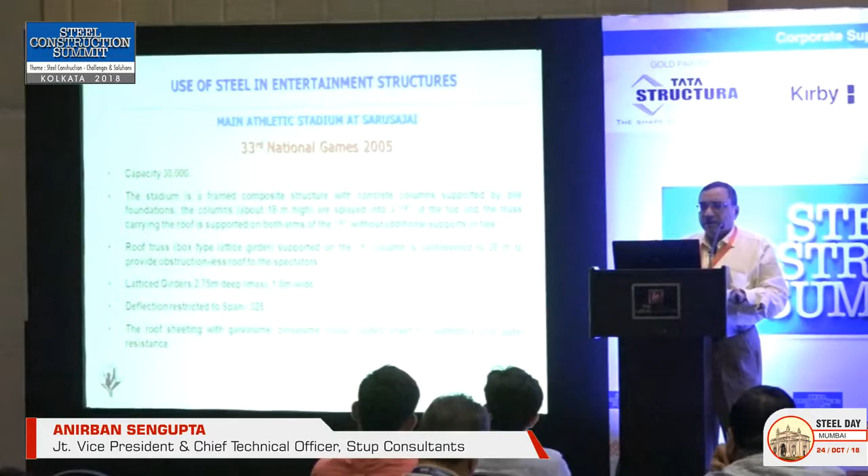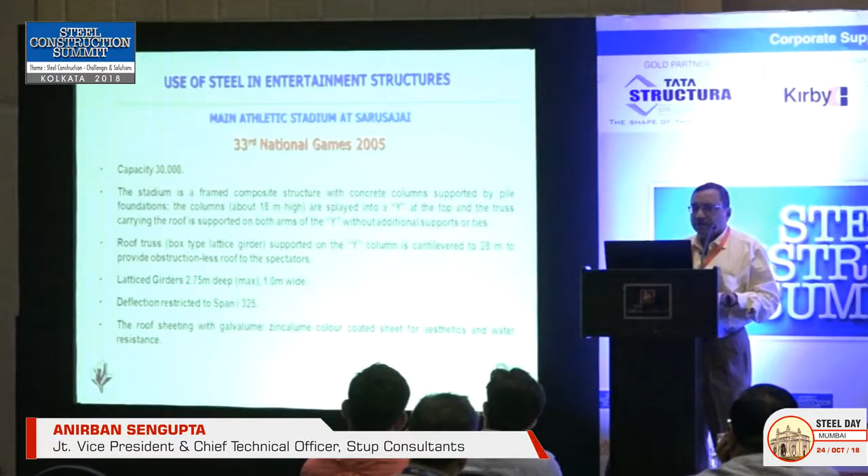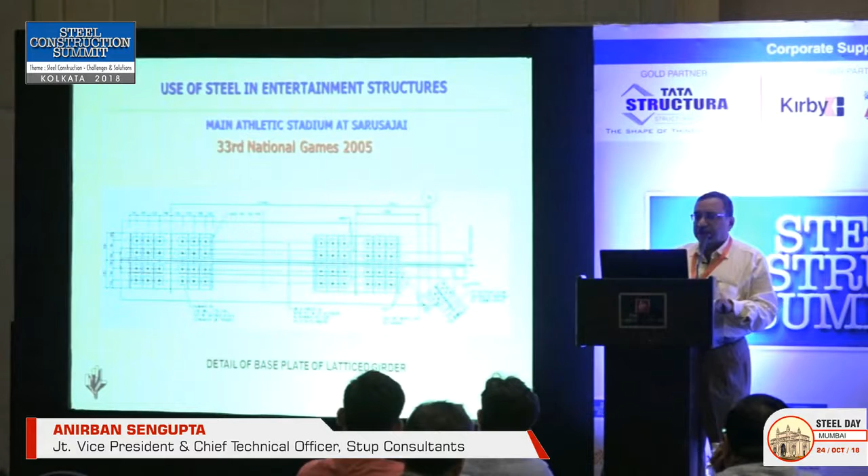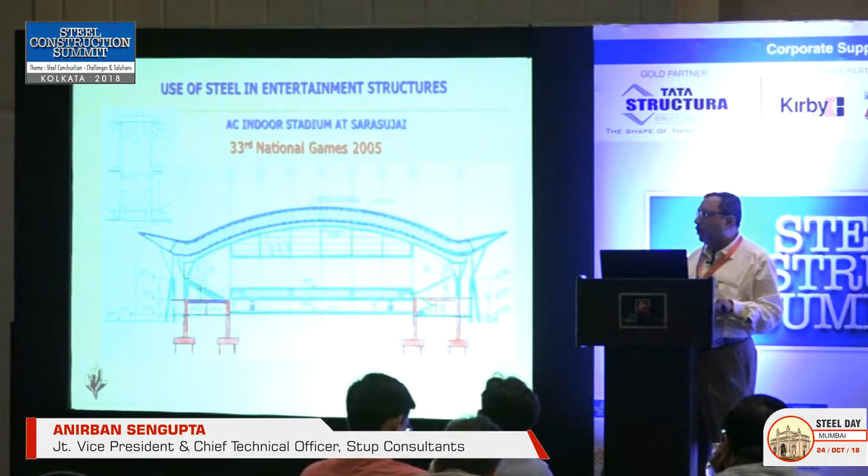This is another indoor stadium. This is the architectural view. Here also the span is very large: 60-meter span, and this truss is around 3 meter depth with 1 meter wide box. This box has been used because in these stadiums a lot of utility pipings, lighting systems, special lightings and cables are fixed on this truss. There is a catwalk on every truss, people can walk inside. That's why the height has been made so large. So this is another example of large span steel construction.

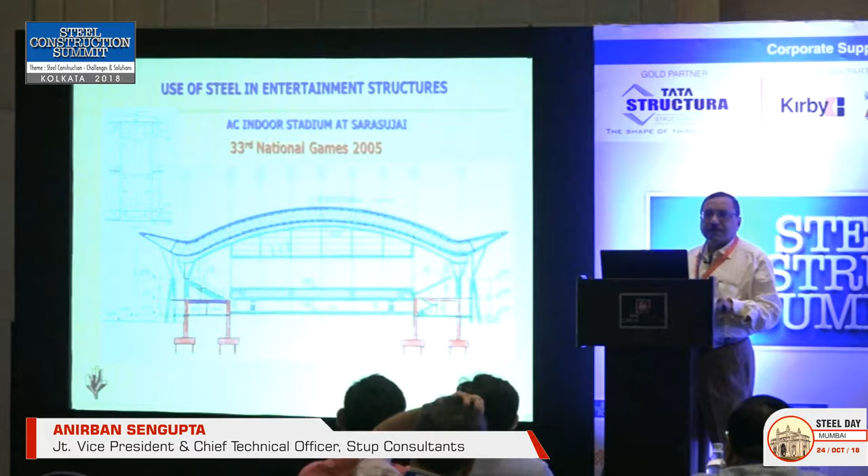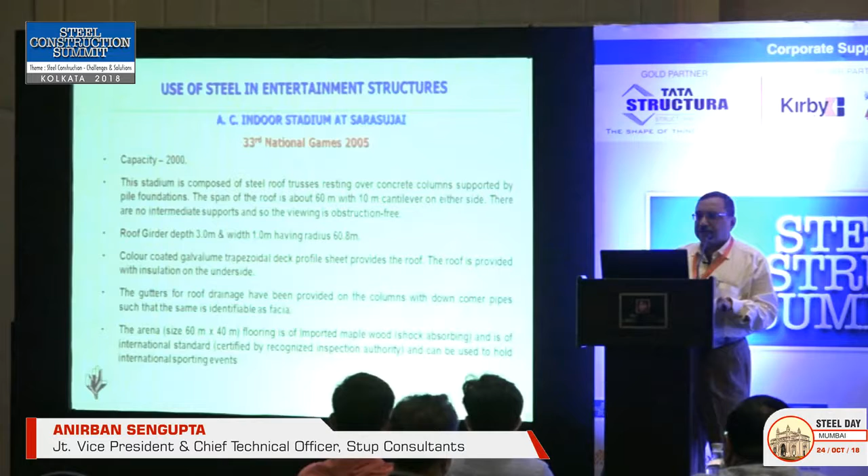This is another stadium called Rajiv Gandhi Indoor Stadium in the same project. This was a double curvature roof, unlike the single curvature ones I have shown you, with a rhino type of nose in the front and back. This follows the architectural requirement, as Manas in Assam is the main sanctuary where the rhino is the main animal. I will just speak about the structural system.

We made a spine arch of 150 meter span at the center, springing from foundation on one side to the other, supported on driven batter piles and some vertical piles. All the other members are latticed girders with spans from 19 to 40 meters, supported on this arch. The arch was built first, all deflections were measured and matched to each truss, so there was no mismatch while erecting.

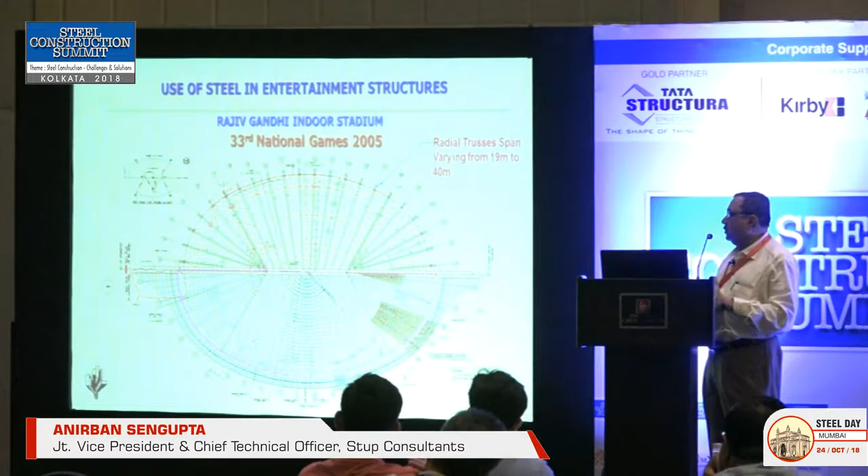Now this is the arch view, 150-meter span with 3.5-meter depth and 2.5-meter wide. This is also an indoor stadium with 2,500 capacity.

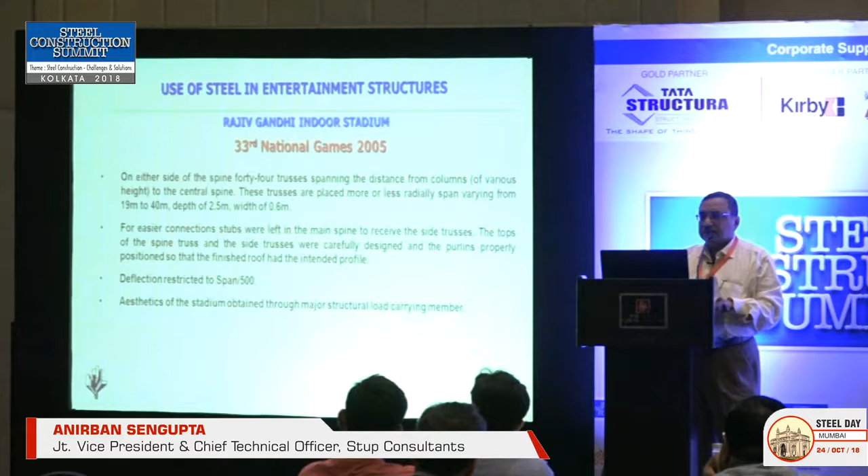Now this National Games project has also won first prize from the Consulting Engineers Association of India for excellence in project dealing, project execution and project engineering.

Now this is a unique stadium. This is the Velodrome in the Commonwealth Games. This was constructed in a very short time. The engineer, contractor, the designer, the client, which was Central Public Works Department, CPWD, all had to work together, and the approving authority was IIT Delhi.

So we had to work very fast, and the time was fixed for the Commonwealth Games. You know that for the Commonwealth Games a number of stadia have been built. This is the last stadium which was awarded to the contractor and to the consultant. This is the last project, and we had the shortest time to build this. So what we have done

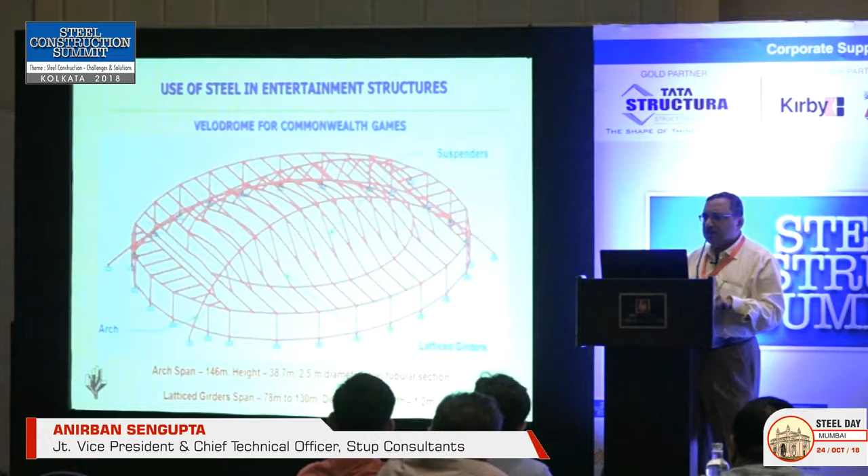So this is the model, these are the two arches, and these are the trusses supported through these hangers. So the arch span is around 150 meter, 146 meter, and height of 38.7. So this is the geometry of the structure.

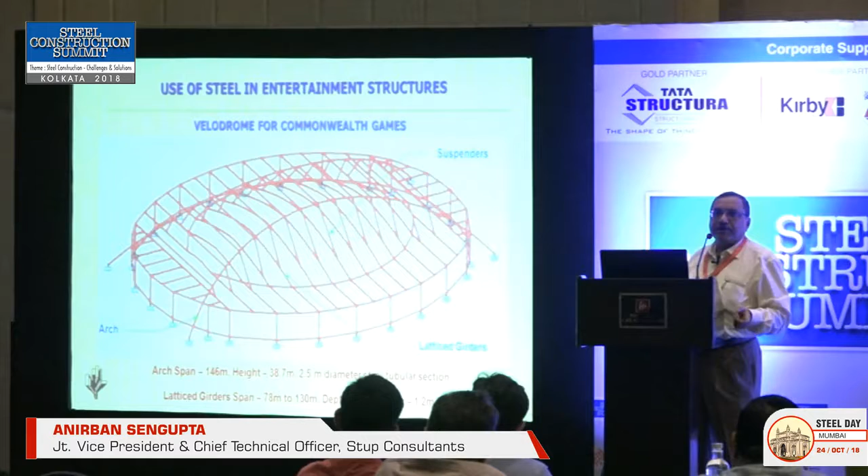Now if you see inside, there is no column inside. So whatever stadium I am showing, there is no column inside, and the viewing is totally free. This side is around 100 meter, and lengthwise almost 150 meter. So there is no column inside. The whole structure is very long span and supported from the roof.

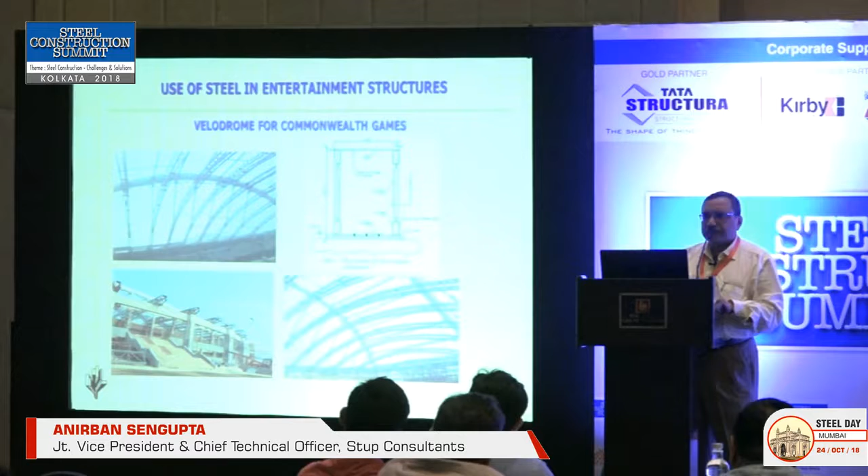This is the section of the truss, 1.2 meter by 1.5 meter. Very thin trusses; inside trusses are 100 meter span. Only a depth of 1.5 meter by 1.2 meter wide, possible because of 5 intermediate supports from the arch through hangers. You can see other views. These are some detailings; I am not deliberating much more on this. This is the truss base detail.

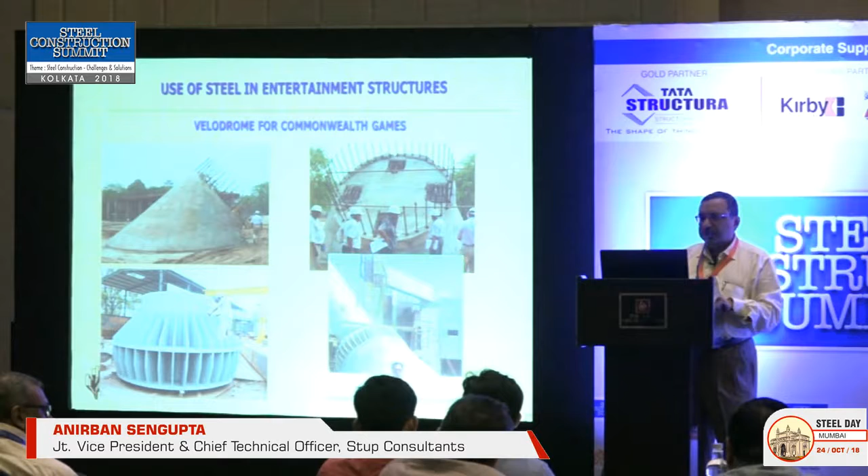Now, as already told by Carol, for this project STUP got the first prize from INSDAG for innovative structures in 2011-12, and the CPWD executive engineer who was in charge of the project also got an award of excellence from the CPWD Director General.

This is a very enlightening word. The Delhi Velodrome is an absolutely marvelous facility of the highest standard, probably only surpassed by the Beijing Olympic Velodrome, which was built at a cost of $215 million. This was told by Roy Godkin, Honorary Vice President of the International Cycling Federation. Unless he gives permission, by homologating the velodrome, no international competition can be held in a velodrome structure. So he is the main man, and he was so impressed that he passed this comment. If you see, Beijing Velodrome cost $215 million, while Delhi Velodrome was built for only $34 million.

Now I am showing you some structures in and around nearby. There I can show you a number of structures. We have done the Noida Stadium, and we are now doing the Air Force Museum in Delhi, which are all space structures and very complicated structures, all in steel. If I go on showing all of them it will take long, so I am showing recent structures. These are all already built, but this one is under construction.

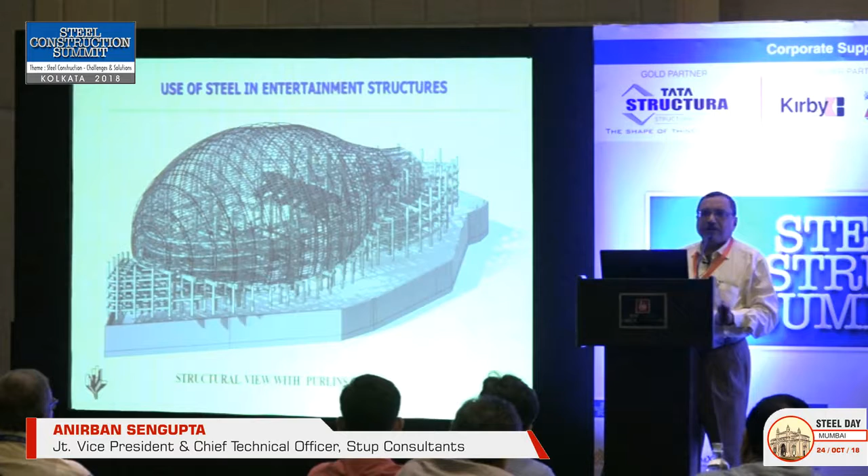This is actually the frame structure. What was built here was done in an ETABS model. This is the steel part of it - there are concrete columns where rooms etc. are, and these are the steel frames entirely. This is very difficult to show with this view, and you can imagine how difficult it was to design. We have completed it, and very soon - I don't know the exact date of completion - it will be done, and you will be able to see a very nice structure in the Kolkata Alipur area.

This is another bridge, but this is not a vehicular bridge - it is a pedestrian bridge, and at the same time it is an amusement park also. Normally bridges are 7, 8, 10, 14 meters wide - 14 meters being a two-lane bridge - so multiples of that are being built. But this is a pedestrian bridge, width is 20-25 meters, so people can go inside, sit, and enjoy the river.

It is under construction in Gujarat, at Ahmedabad, over the Sabarmati river. If you go there, there are bank developments - a lower promenade and upper promenade where you can walk, and boating facilities are there. They are building this, between the Ellis Bridge and the Sardar Bridge, there are two vehicular bridges. They are building this type of bridge which is full of steel construction.

It is full of steel construction, there is nothing there except the walkway - everything is steel. We tried to make the walkway of timber too, but because of durability issues we could not. I tried to make it with a very high grade of steel, because the stress variation which causes fatigue is not that high here, since dead load is always permanent and live load is basically not as high as in road or railway bridges. But I could not get steel better than E410 grade. We talked to a number of people - there is a steel forum here - so I am telling you, please start manufacturing those high grade steels so that we can use them somewhere.

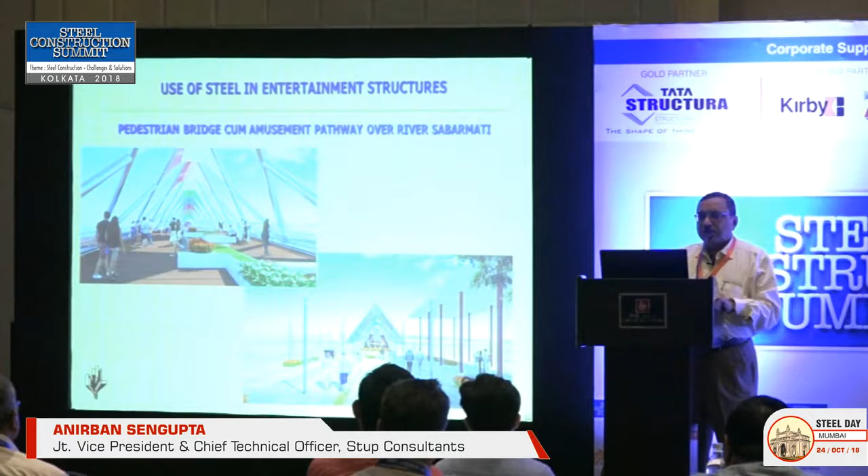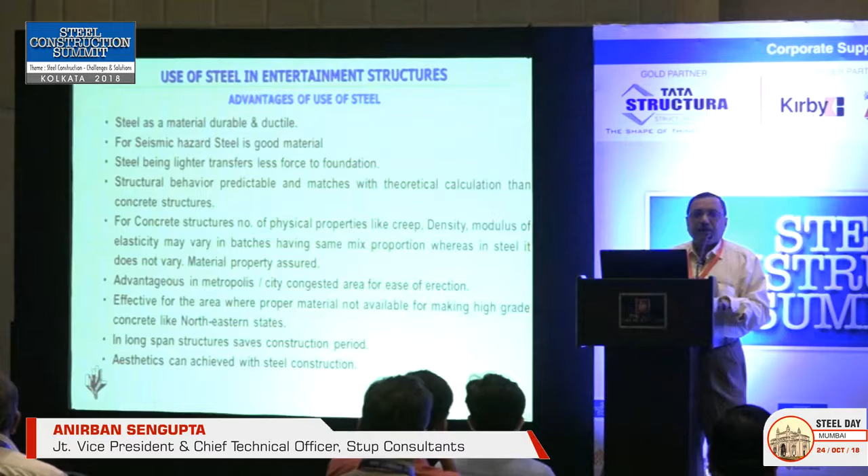Now with using steel, there are a number of advantages that have been told by Mr. Mukherjee, but I want to add a few points. Steel is a material which is durable, and first type is ductile. It's a very ductile material, and it helps in seismic zones where the ductile material is most important, we look into ductile detailing for steel, for seismic zones.

And the next point is that steel is lighter, very light compared to concrete. Concrete dimensions are very heavy, so steel dimensions are very thin, so it is lighter and transfers less force into the foundation, and it attracts less seismic force, because seismic force, earthquake force, is a function of the gravity load. So that attracts less seismic force. That is also an advantage in developing the foundation.

Structural behavior is very predictable. The joints, everything, whatever you design. In concrete, what happens, these joints become rigid joints, and the behavior sometimes is not very predictable. So in steel, it is very predictable, and whatever calculations we do, deflection etc., it is exactly matching. I have one experience, giving you one example, that I was doing a cable stayed bridge of concrete construction and a cable stayed bridge of steel construction.

In the case of steel construction, the deflection control while erection of the cable, whatever we are calculating, is matching much closer to the calculated values.

Concrete is not like that, because in concrete, the batching changes the density, the creep factor changes, the modulus of elasticity changes. We have done batching checks for elasticity, and we are getting different modulus of elasticity in different batches. So in one batch it is some elasticity modulus, in another batch it is something else, the density is a little bit varying. So whatever I am assuming, 2.5 density in concrete, or 5000 root over FCK as the E value, that is not exactly matching at site while doing. But in steel, my material property is assured, the density is assured, the E value is assured. So all those limit conditions are much better managed in steel construction.